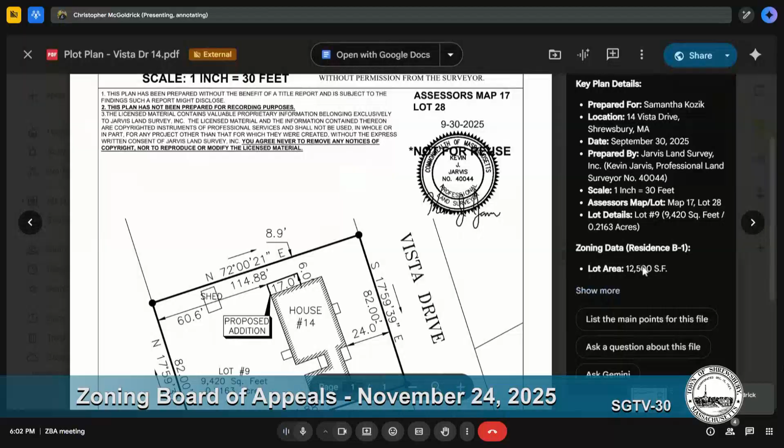If you could walk us through what you're intending on doing. So we live in a 3-bed, 1-bath ranch. We have 2 kids, third on the way due March, and we're looking to add a master bathroom off of the north side of our house, which is where the property is a little bit tight. We chose to go off the north side of the house instead of the west side to preserve the size of our yard that we have remaining. I think it'd be 17 by 6 feet, but currently the 1 bathroom is a little tight.

Imagine. All right, we're going to open it up for the board's questions. Dave, would you like to start us out? Nothing yet at this time. Ann? I didn't have any questions about this. It seems pretty straightforward. Thank you. Megan? I don't have any questions. I'm good.

Okay, I'm just trying to understand, that's all. Take your time, Fran. Yeah, I don't have anything right at this moment, but let me try and understand. Okay. Maybe we hear some public comments and get back to comments? I agree with that. Okay, all right.

This is a public hearing. Is there anyone that wishes to be heard on this matter? Okay. Can I get a motion to adjourn the public hearing, please? I move to adjourn the public hearing. Second. All in favor? Aye. Any further discussion on this?

Fran? Yeah, so we have a shed existing there, according to plot plan? Correct. There is an existing shed there? Yes. Did any of the abutters get notice? Nobody here? No one's here. So we did receive some correspondence, I believe that was included in the materials, more just questioning about specifics of the application. That information was provided to the abutters, so they were notified and we got some questions. I'm good, I don't have any more.

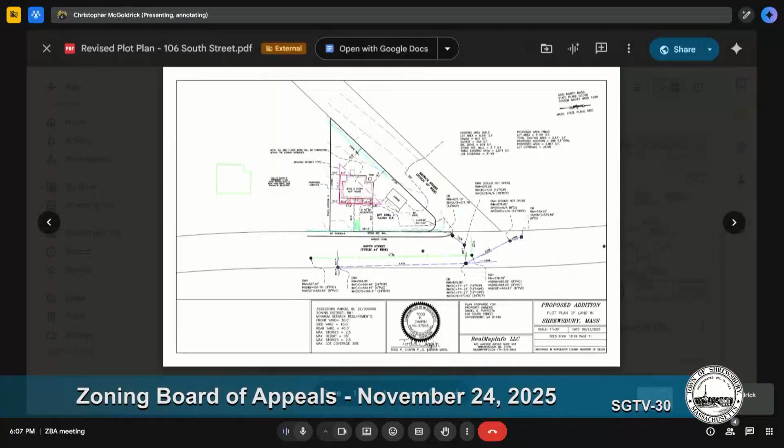Did you say you're going to demolish and rebuild the garage in the same location where it is? Actually, yes, both the house and the garage. The garage has the same condition as the house, which is not possible to recover; it's very unsafe and so deteriorated that it's not possible to fix. So the garage is exactly the same footprint as it is, and the house is the one being expanded, correct? Absolutely, sir, yes.

I got nothing else right now. Ann? So I do have a couple of questions. If I understand correctly, both the house and the garage will be demolished, is that right? Yes.

Can you explain a little bit about why it's not possible to build the new construction in conformity with the setbacks? Yes, we have a building permit right now, and when we started working with the engineer and the contractors on the walls, they reported the walls were in bad condition and not safe to work on first. The house had been built in such a way that it doesn't conform to any construction codes up to date. It has no seal plates, no foundations, the walls are like 2x3s, they have no insulation, and there is no attachment between the foundation and the walls.

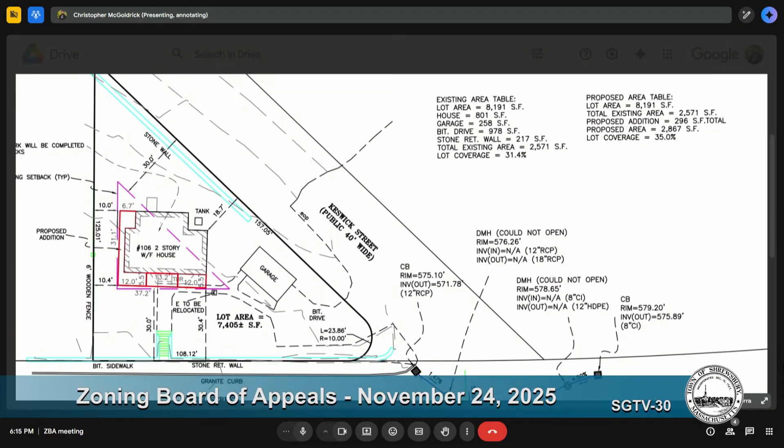There's currently a lot of trees and whatnot on the South Street side and the Keswick Street side, correct? Yes, yes.

That's all I have. Mr. Garcia, you have a fairly steep retaining wall on the South Street side, I believe. Yes. What's the integrity of that wall? It's very solid. I already brought some contractors in there, and everybody's amazed how steady that wall is. It's been that way for so many years, and nothing has happened to the wall. It was made in a good way, and it's very solid, solid as a rock.

Could I just ask again, with the garage, is your intention to do nothing to the garage? You're going to rebuild it in the same footprint? And it is a two-car detached garage? No, it's only a one-car garage. One-car detached garage that you intend to rebuild? Yes, one car garage, yes.

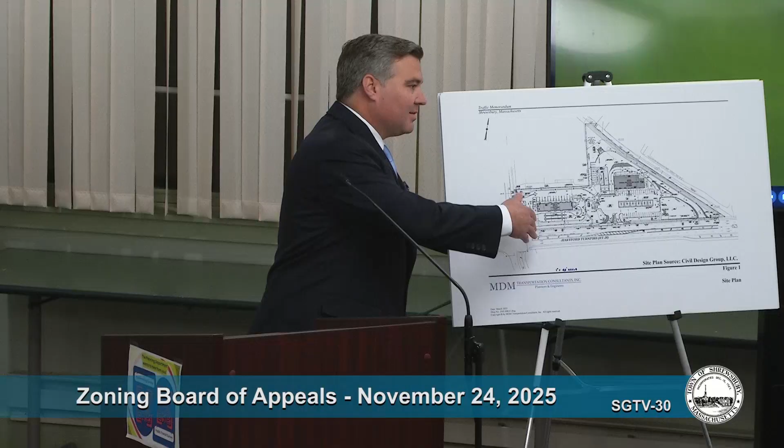My client, Demoulas Supermarkets, Inc., owns the shopping center at Edgemere Crossing, shown across the street from Route 20 here at 200 Hartford Turnpike. Can you see this okay on this side? I wish we had it on the screen. Can I turn this way a little bit?

The original site plan that the applicant proposed had driveways located here, up at the eastern end on Route 20, right in the middle on Route 20 here, and then on Lake Street over here.

Now, through the planning board process, the applicant had received some negative feedback from Mass DOT about this middle driveway on Route 20 here. It originally had a left-out option and a right-out option. So the left-out option would go east on Route 20, the right-out option would go west on Route 20. We raised this as one of the issues in the planning board process, but Mass DOT also provided some negative feedback about it.

Eventually the applicant eliminated the left-out option onto Route 20. Reason being, you'd have to cross the westbound traffic through multiple lanes, and it's a very high-speed area there because of it. So that was eliminated. That was a necessary item for this to proceed forward. We think it was the right choice, but as the traffic engineer for the applicant identified, this in and of itself created additional problems with the site plan as it existed. It contributed to problems that already existed with the site plan.

The applicant was here before this board approximately a year ago, September of 2024, seeking special permits and variances. When it was here, it presented the original site plan to the former board that existed at the time, and that had that left-out option. Obviously, it was a proponent of that at that time. In being a proponent of it, the traffic engineer of the applicant demonstrated and advocated for that left-out option, claiming that it was basically a necessity of the site plan for it to function.

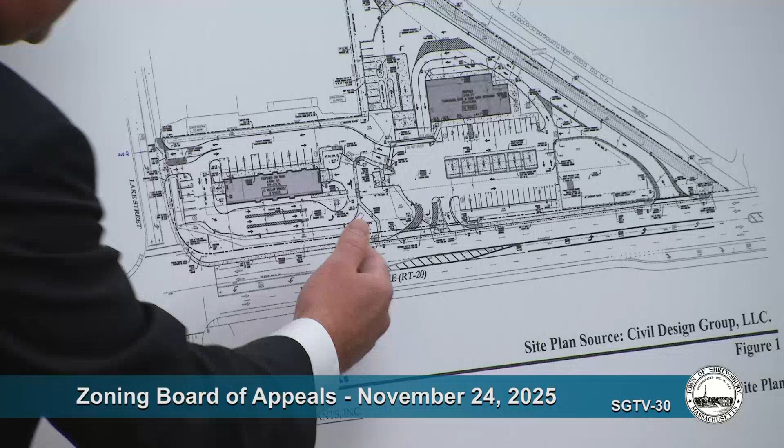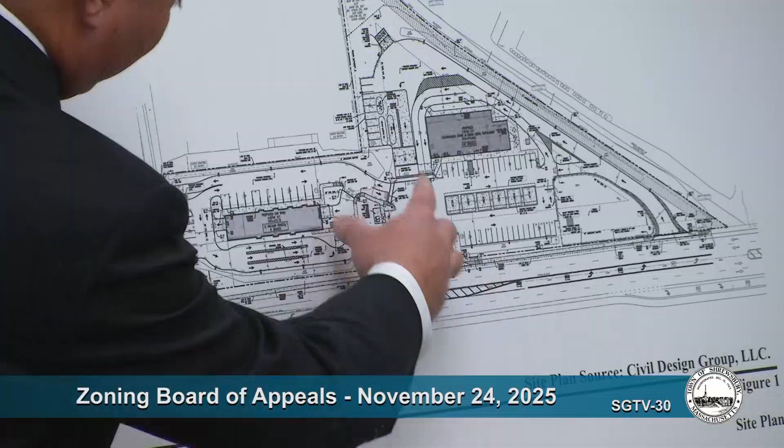So what he was describing is someone would come out of this middle driveway on Route 20 and get in the left turn lane to then make a U-turn, but through Edgemere Crossings Plaza, through where the Market Basket is located today. Not stopping to shop there, but bypassing the people that are coming and going from their cars to go to those shops, to the bank that's there, and using that to go to an easterly driveway up here at Edgemere Crossing to then get going easterly on Route 20 again. Or the other alternative he identified was that it would force more traffic to go over here to this Lake Street driveway.

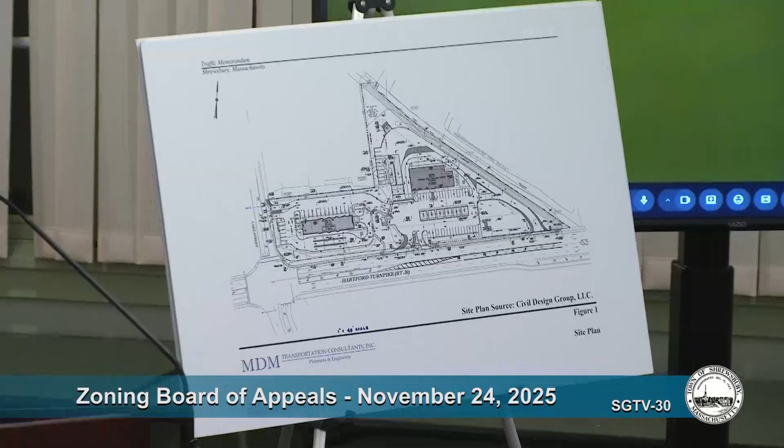He stated at another point in that hearing before this board, at the 30-minute mark, quote, I mentioned unintended consequences of anything that's developed here. To the extent a left turn is not allowed, folks will have to rely on Lake Street more regularly, or would most likely use the Edgemere Crossing Plaza as a staging point to be able to continue their trip eastbound. I don't think those conditions are ideal, end quote. That sentence was his words. I don't think those conditions are ideal. They're not ideal. Forcing traffic in this congested area, or more likely, as he said, through my client's property, to use it as a thoroughfare.

So as to that Route 20 driveway, what did the applicant do before the planning board within the last year while there were a number of hearings? The applicant did not offer any solutions to prevent what the traffic engineer identified was the likely scenario of people going through Edgemere Crossing, through that plaza to reverse direction. It's a significant safety issue for Demoulas. At the very least, obviously, a nuisance issue.

As to the proposed driveway on Lake Street, it's located only 120 feet from the intersection where the light is here, Lake Street and Route 20. There's natural queuing that occurs along Lake Street because of the signal, as you have with any signal throughout the town. A signal is designed intentionally to stop traffic for a period of time, so you can have an orderly flow of traffic going in each direction. There's obviously natural queuing that occurs there. The problem lies with where the applicant wants to put this driveway because of that queuing. It wants to put the driveway within 120 feet, which is very close to that signal. And that comes within the queuing area. Rather than put it up here, where there'd be no queuing, put it within the natural occurring queuing area.

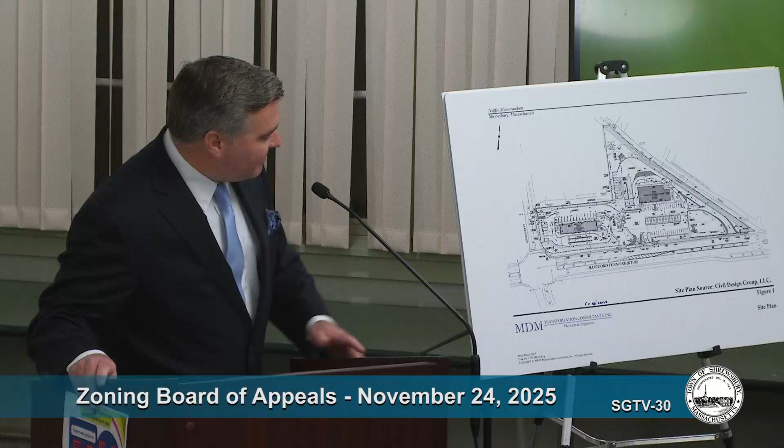Demoulas also hired a traffic engineer, Mr. Nagy, who's here tonight. He has a lot of experience with this intersection, having worked for Demoulas, the design and the mitigation that goes on here and the monitoring. Demoulas hired him to come before the planning board to identify and share his expertise and his analysis with the planning board. And he said similar things to what the town peer reviewer traffic engineer had said. He identified that this could increase congestion in this area because of how close the driveway was to the signal, how the natural queuing had occurred here, and this would cause issues. Identified that there could be gridlock here because of traffic coming down Route 20, taking a right onto Lake Street, but being blocked by people trying to take a left out and getting stuck in the queuing and then blocking up that roadway. Lake Street's obviously an important street to the town for access in and out of this area.

So what did the applicant do in response to that? Well, before the planning board, the applicant didn't do anything to address that issue.

The only thing it did was, finally at the July 10th, 2025 hearing, bring before the planning board two concept plans for widening the approach on Lake Street right here to make it additional lanes. It would be two lanes.

This was the first of the two concept plans. You can see how they've added an additional lane for the approach. Let's come down here. Okay. And a second one, I'll show you in a minute, is very similar. The applicant specifically identified that this would be the solution to the problem.

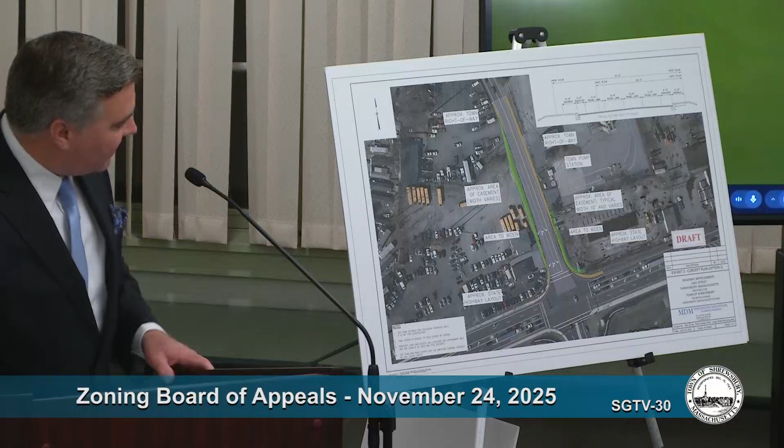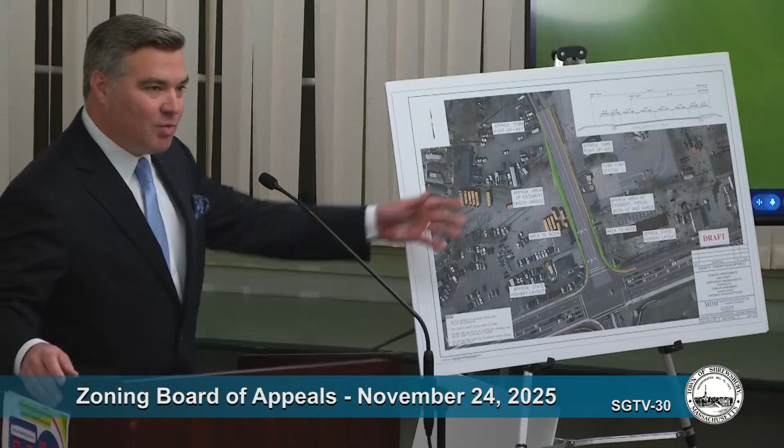They identified that it would require land takings and acquisitions or easement rights from abutters, and potentially the removal of a town pump station that's up here. It's shown in color here, the areas that the applicant identified would have to be taken from other landowners. They came before the board with this idea, but no actual concrete deal in place where landowners would provide this land or these easement rights. So as it stands today, legally, it cannot be done.

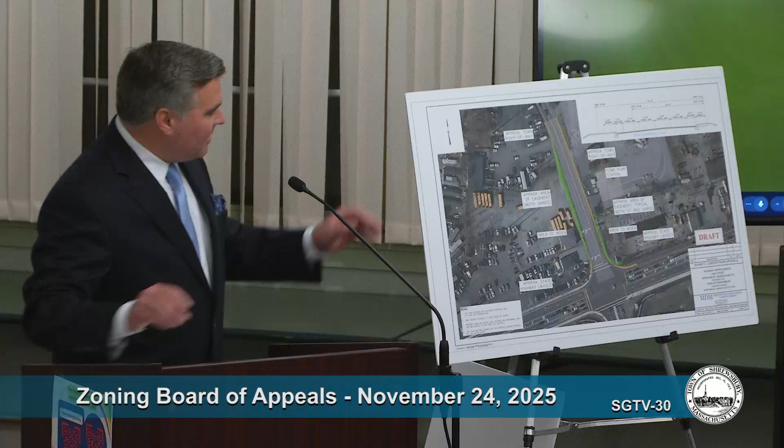Okay, I'll show you the second one, which is very similar. Another version of the widening. Again, the color shows easements or property rights that would have to be taken from other landowners, and the town pump station that might have to be moved up in this area.

There was no evidence before the planning board that this actually was set in place and could be done. There was also no technical information provided by the applicant as to what would be necessary if this could go in place. If they had the property rights in hand and could do this tomorrow, what else would have to be changed about this intersection?

They didn't provide any technical information about whether Edgemere Crossing's driveway here would have to be realigned. They didn't provide any technical information about whether the signals in this area would have to be physically moved somewhere else. They didn't provide any technical information about the two lanes coming down Lake Street that would now turn left and merge over here onto Route 20, if that shoulder needed to be widened in that area. Could a tractor trailer and a vehicle make that transition? None of that information was provided.

Was this the optimal layout? Was this an optimal layout? There was no review of it. And that was presented in July of 2025.

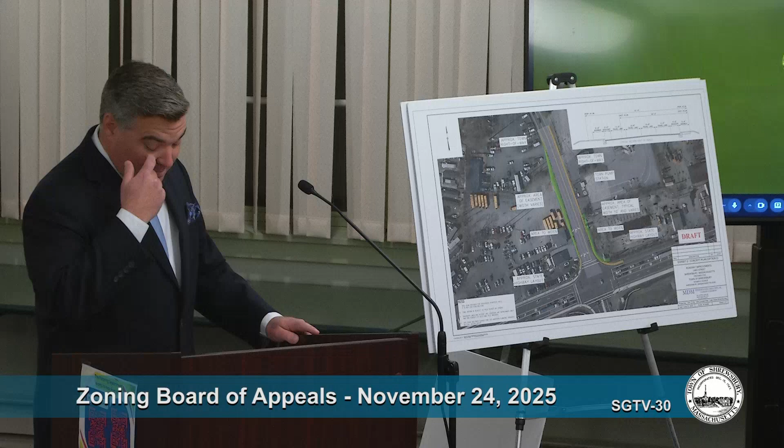These issues, which its own traffic engineer identified as problems, issues that the town peer reviewer identified as problems, issues that Demoulas's traffic engineer identified for the planning board. The planning board was apparently swayed by this concept idea, these concept plans. But as it stood, the planning board did not have any evidence before it upon which it could make the findings required under the bylaws about these certain factors. Therefore, the decision needs to be reversed and site plan approval denied. Thank you for your time.

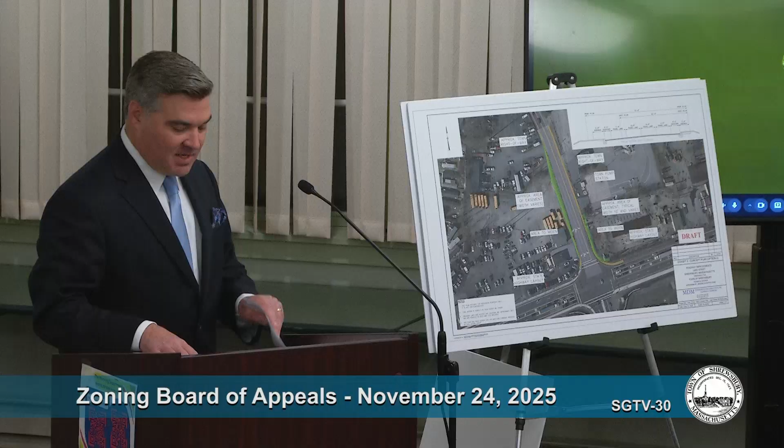Thank you. Would you like to go first? Sure. Thank you. I have some questions of Attorney Madaus.

Thank you for coming, Attorney Madaus. If I'm understanding this correctly, this is a somewhat unusual appeal of a planning board decision coming before the ZBA because of a quirk of the law. Are you able to tell us what our standard of review is here today?

Sure. Thank you. Good evening, members of the board. Stephen Madaus, Town Counsel. In response to that question, our bylaw provides that any person aggrieved by a site plan decision may appeal under Section 8 of Chapter 40A to the Board of Appeals. So it's not necessarily a quirk. Not all municipalities provide an appeal mechanism for site plan review, because as you know, site plan review is a review of an allowed use. It's not a determination as to whether the use would be allowed, like a special permit.

It's a review with limited reasonable conditions to regulate the use. But our bylaw provides an appeal process, not just for the applicant, but for any person aggrieved by a decision of the planning board. It invokes Section 8 of Chapter 40A, which you're familiar with as an administrative appeal. So this board has all the authority of the board below, which is the planning board, to modify or overturn the site plan decision subject to appeal. Of course, the burden is on the appellant, as presented by Attorney Fiore, to make their case as to why the decision should be overturned. It would require 4 votes of this board to overturn or modify the decision of the planning board, pursuant to your rules.

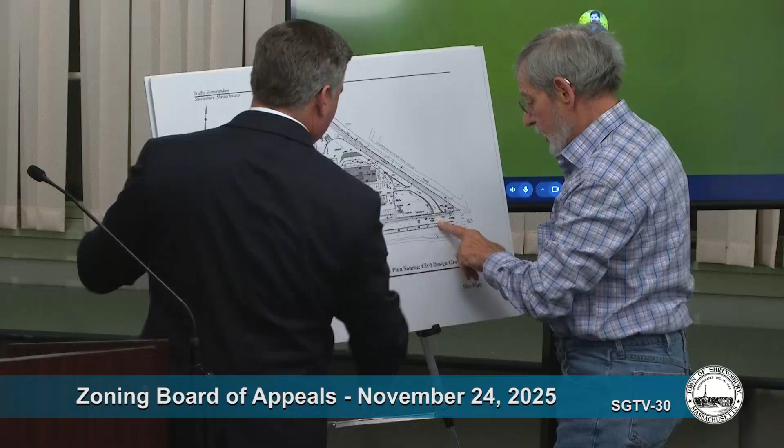So a traffic signal? You're pointing to this easterly driveway, which is a one-way. Well, it can be made two-way. Make it a light, is that possible? In relation to putting a traffic signal there, that would require MassDOT approval to consider. They would determine if it meets the warrant for a traffic signal at that location. That's not under the purview of the planning board to compel.

My opinion, this is never going to work. It's just never going to work. Someone's going to block this, it's going to jam up worse than it is. This exit, you can't go out here to try and make a left-hand turn, or it's going to be mayhem.

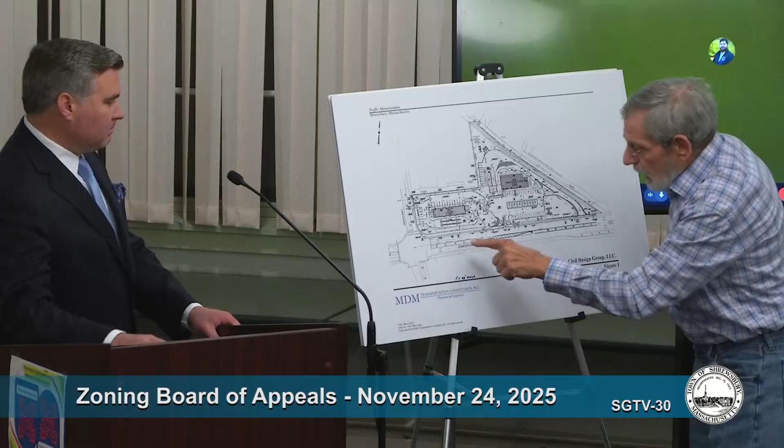Can you make a U-turn out of here? How many left-hand turn lanes are there? One? I'm asking you, sir, how many left-hand turn lanes? I'd ask Mr. Nagy to confirm. Say your name for the record, please. Rob Nagy with VHB. So there's only one left turn lane at that location, heading in the westbound direction.

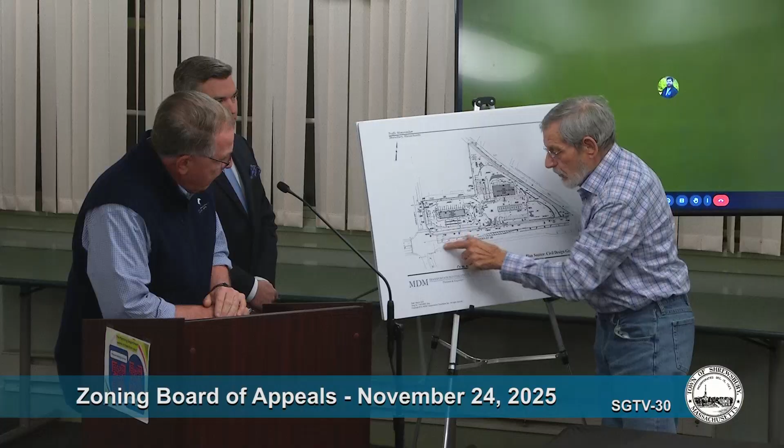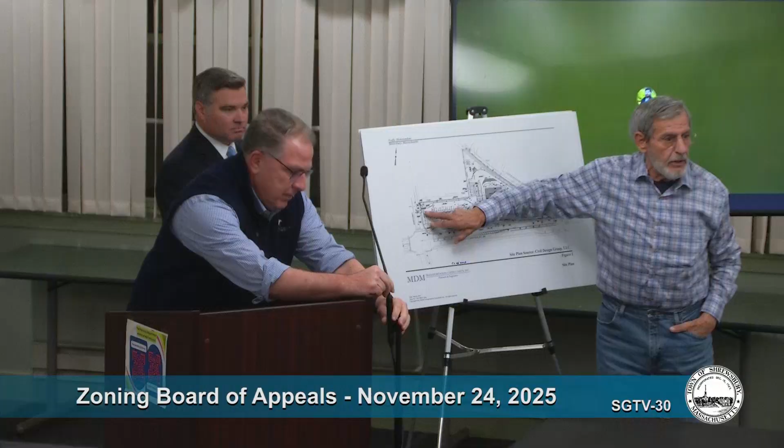So someone coming out of here making a right could reasonably make a U-turn right in the middle of the road. He doesn't have to go through here. Can you speak through the chair, please? What I'm saying, madam, is that this will not work, in my opinion, in any shape other than making right-hand turns that go north. In my opinion, people could make this left-hand U-turn, which is a mitigating thing.

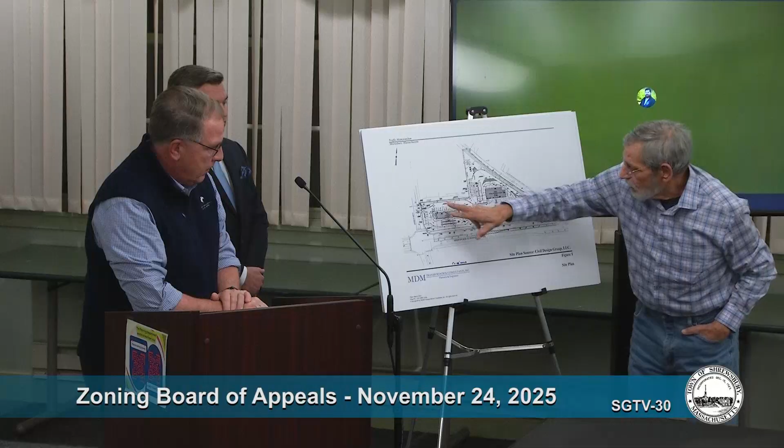Another mitigation to me is to traffic light this thing. But this, making a left, coming out here, I won't support it.

So I just wanted to state, in terms of this plan and the review that was done, we've uploaded the planning board's record. The board has 100 days to consider this application, which puts us beyond the December 22nd meeting. What I'd encourage is the board members to look at the record that the planning board considered. There's a wealth of information there that goes into significant detail of the turning movements, of different design elements, and the planning board, in rendering their decision, considered all of that information.

In addition to that, I would point the board to the conditions of approval of that decision, which includes extensive post-occupancy monitoring of traffic. It includes additional improvements and potential for improvements both to Lake Street, as well as encouraging coordination with MassDOT on the Route 20 sections that connect to the driveway.

A major part of the discussion certainly was traffic. The board and any members of the public are well aware of the existing conditions at this location that are challenging, to put it lightly, in its existing state. The board is, I'm sure, aware that Demoulas and their project was recently put in. The status of that, they also have traffic monitoring obligations that essentially mirror what was placed on the 193 Hartford Turnpike applicant to a large extent.

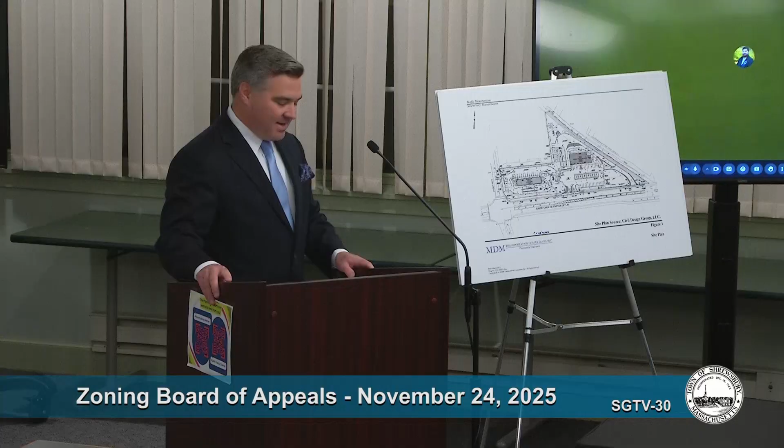If that's the case, how come he said something different a year ago to this board—that they needed that left turn, because otherwise people are going to go through Market Basket's parking lot or clog up Lake Street? So it's not personal at all. I ask you to look at the record entirely and appreciate your attention to it and your decision. Thank you.

So if it is in agreement with the board, I would like to ask for a motion to continue the hearing to a date certain, which would be December 22nd. I will move to continue the matter concerning 193 Hartford Turnpike to December 22nd at 6 PM. Second? Second. All in favor? Aye. So moved, thank you.

Got my seconds and my ayes mixed up. It's all good, right?

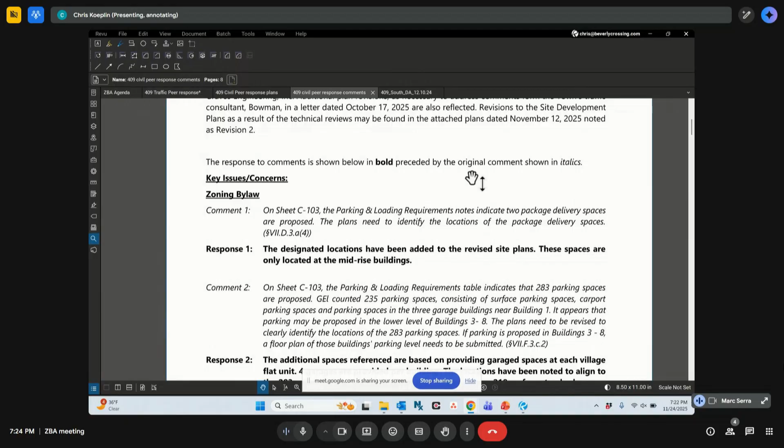I don't know if it's coming up. Is that coming up? I guess, let me see what's up. Let me stop sharing. Share it again. Try it this way. There we go. So I'll go through the comments that we did provide responses to. I'll try to focus on the more consequential ones as opposed to really some of the typographical or administrative notes, and I'll abridge the correspondence between myself and Mr. Walsh.

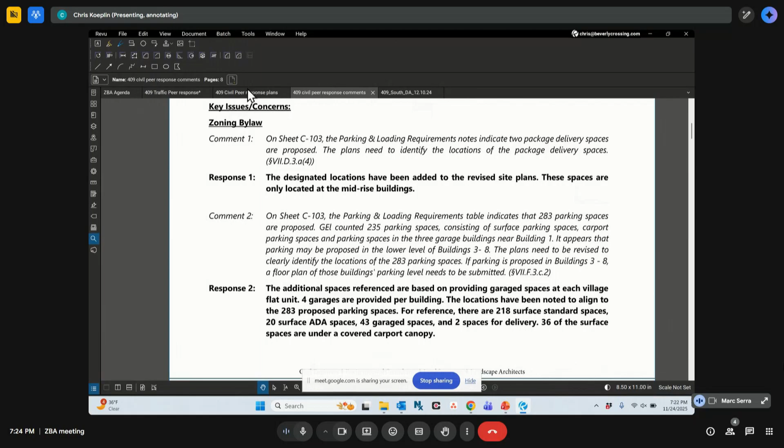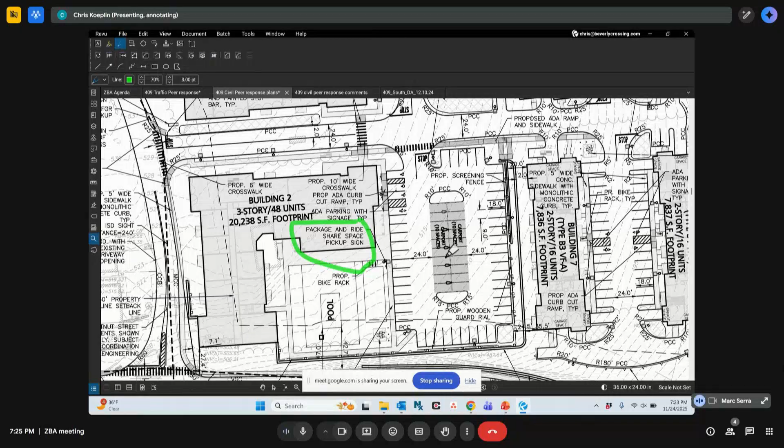On our site planning, he had asked that we provide a designation of where 2 package delivery spaces would be located at the mid-rise buildings. That was simply a labeling note, so we have 1 space at each of the mid-rise buildings. At the Village Flats, those operate more as a small-scale residential, so those spaces are generally open to everybody. And I see Chris has the plan up, and he's going to highlight. Package and rideshare space right at the amenity entrance, and a similar space exists on the opposite building on the other side.

Mr. Walsh noted about parking spaces -- the plans need to be revised to clearly identify the locations of the 283 parking spaces, is the general gist of the comment. What we failed to note, or Mr. Walsh failed to pick up on, is the parking spaces associated with the Village Flats. There are garage spaces inside each of those buildings, so those have been clearly labeled and annotated as such on the plans, and we think he'll find that very straightforward.

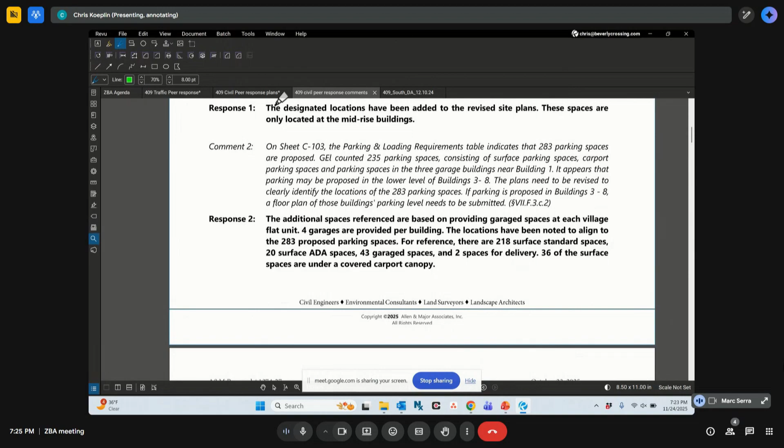On one of our sheets, please note the electrical, telephone, and cable conduit connections for buildings 5 and 6 -- those have very simply been added. Those will be subject to final refinement and detailing as we walk through the process with Selco on the utility conduit layout. Plans need to include names and addresses of abutters located adjacent to the property. This is a requirement of the zoning bylaws, and he cites the section. We've simply added those, all of the names as they exist on the tax assessor rolls.

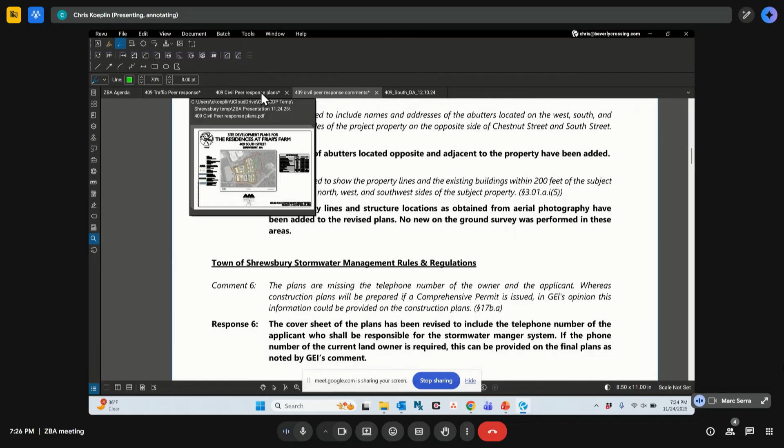Similarly, the plans need to show property lines and existing buildings within 200 feet of the subject property to the north, west, and southwest. We have done that based on digital aerial photographs. We digitized in property lines. No new site survey, but it's hopefully enough for the board to identify where adjacent structures are to the best of our ability.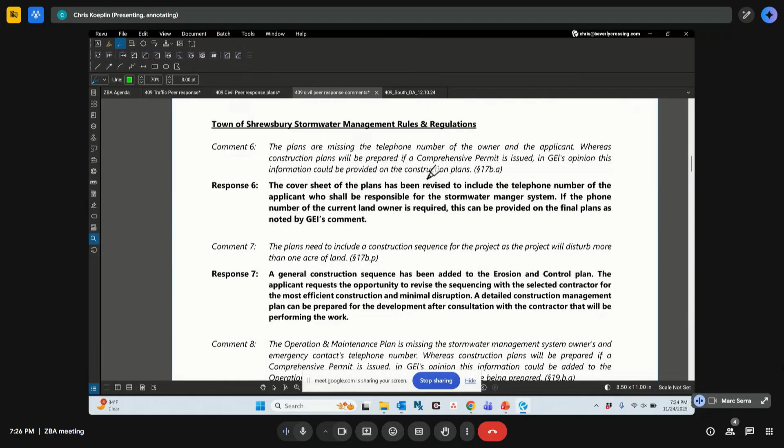Under stormwater management rules and regulation, the plans are missing telephone numbers of the owner and the applicant. We certainly added those to the cover sheet as requested. We also note that Graves Engineering had put in place that this information could be deferred to a condition and provided on the final construction plans. We've included it at this stage, but should the board wish more information, we'll make sure that's in place for the final plans that come in front of the board prior to construction.

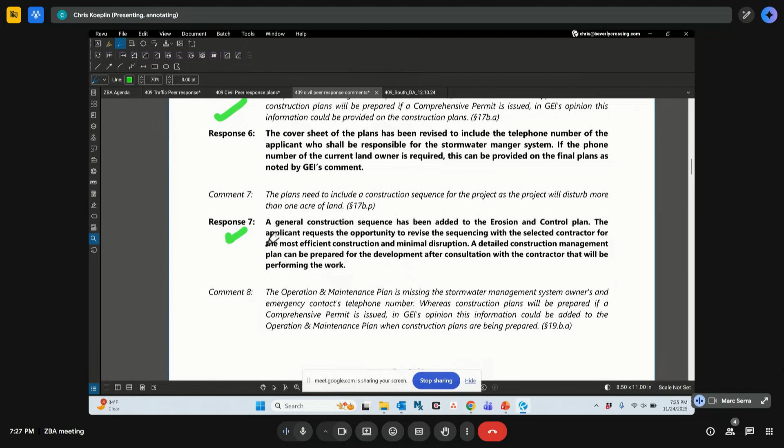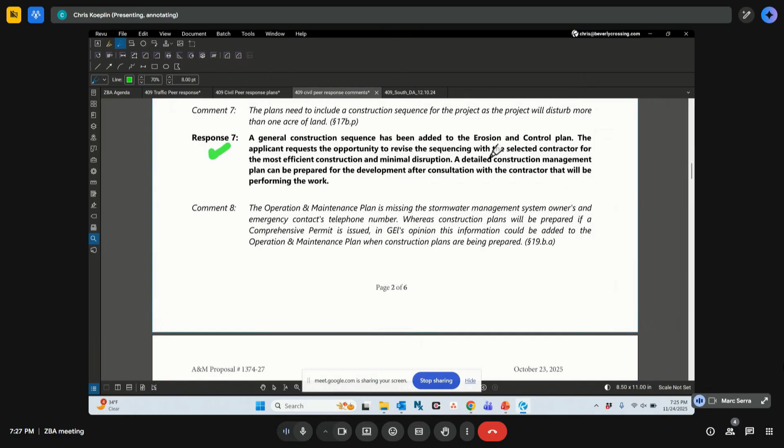Similarly, under comment 7, the zoning bylaw requires that we put a construction sequence on the plans where we will disturb more than 1 acre of land. We have added that on the erosion and control plan to give a general step-by-step itemization as to how this project would be developed in terms of the earthwork, the foundations, general cuts to fills. But what we also asked for in the letter is the opportunity to further detail that construction sequencing as we get closer to construction. We always look to put information on the plans in a schematic fashion at this stage, but as we engage more consultants and know more about the project and how it will ultimately be built, we will further refine that.

Should the board want that additional information, similarly to the comment above, we would provide it as we get closer to construction in a construction management plan, which will be a more wholesale document than the notes on the erosion plan. Comment 8, the operation and maintenance plan is missing stormwater management system owners and emergency contacts, and he goes on to note this could also be a future condition. We have added that information as appropriate, but final management details for the O&M for the stormwater systems can be integrated into those final documents.

Comment 9 is really an administrative note. GEI has no comments relative to the waivers. We provided no responses. That seems appropriate.

GEI under comment 10 did make note about their analysis relative to the number of parking spaces provided on site: 283 spaces, whereas 294 would be required in strict compliance with the zoning bylaw. We spoke about this in great detail during our last meeting with the board, that we are collectively relying upon the information we know about the tenancy, the applicant, our experience with site management for a project of this nature, and MDM Transportation's familiarity with a project of this type. We as design professionals are noting that we believe the adequacy of the parking is sufficient as proposed.

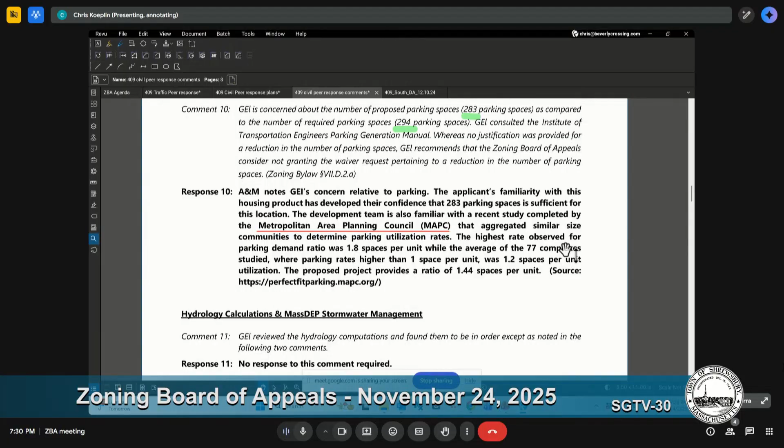1.44, excuse me, 1.44, I apologize. We're providing 1.44. MAPC advises generally 1.2 utilization. Thank you for clarifying.

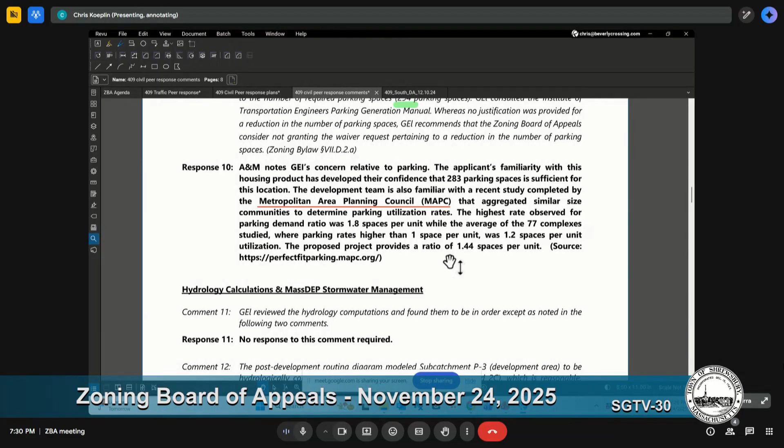Comment 11, GEI made a general note about hydrology computations, found them in order. We agree, thank you. Comment 12, he makes a note about some coordination within our HydroCAD planning model and adding additional schematic information on how the buildings will be drained into the stormwater collection vaults we're proposing. We have modified that information on the site plans to give a general indication as to how the roof drains from each of the buildings, specifically the village flats, will be collected and drained into our subsurface system.

On the rear of the village flats, though, this board may recall we have a walkout on that lower level. So GEI's comment is, how will we drain those if they come out 10 feet lower than the rest of the site? So the design model we put forth is that the lower half of the village flats could drain to the surface, and drain sheet flow down the slope towards the wetland area.

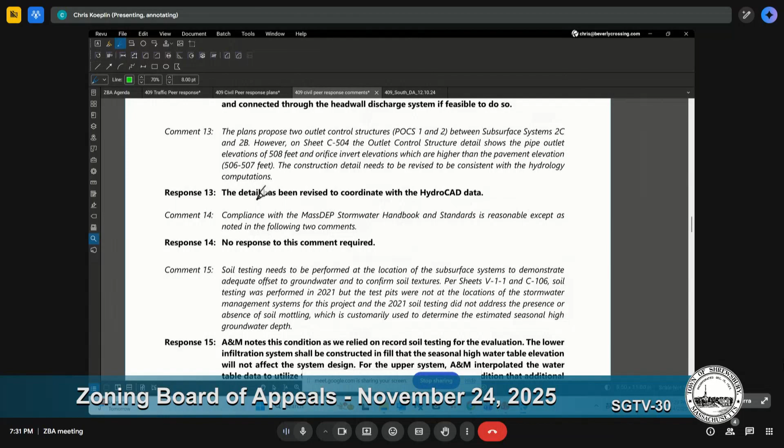Our models take that into account because of the topographic change out here on the site. Comment 13 was clarification and coordination on our outlet control structures for our drainage systems. Our response is we've simply coordinated that with our HydroCAD model.

Comment 14, compliance with the Mass DEP Stormwater Handbook standards is reasonable as noted below. No response needed to 14. However, under number 15, GEI notes we provided some soil testing back in 2021. This board, or the previous version of this board, may remember an application we were involved in that was promoted here on the site.

So we relied on that soil data in putting together our stormwater management systems. The exact location of the test pit is not directly underneath the stormwater field as we're providing on this plan. So what we're requesting through the board is we have reasonable familiarity relative to the drainage and soil condition, but the opportunity to confirm the groundwater location and field position as we near construction, once we have better opportunity to get out and disturb the site. Should we find that anything requires changes, we would have to review them with this board, should there be wholesale changes to the site plans.

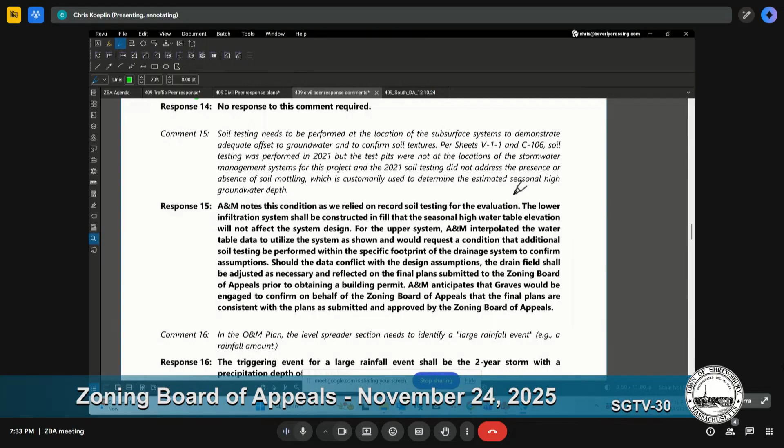Comment 16, in the O&M plan, the level spreader needs to identify a large rainfall event. We've simply done that by saying our large rainfall event is 3.25 inches over a 24-hour period, which is a 2-year stormwater standard. So we've annotated that in the report.

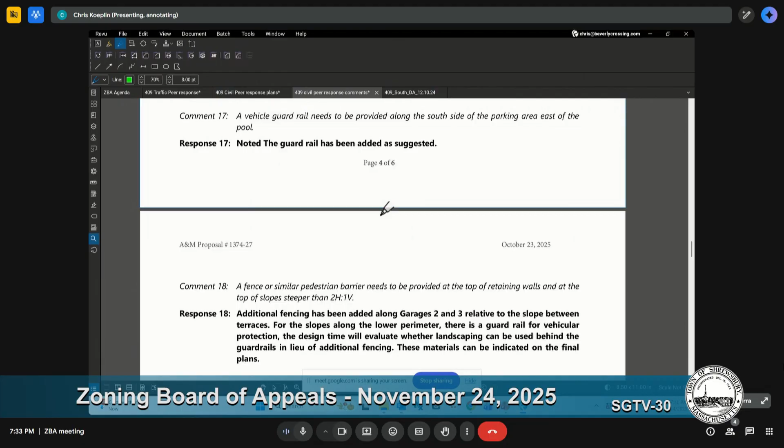Comment 17 is a suggestion to add a guardrail on the south side of the parking area. We have agreed, we have added that guardrail. It is denoted on the plan.

Similarly, comment 18 is about fall protection fencing on retaining walls. We added some additional fencing between garages 2 and 3 adjacent to a slope. For additional fencing, we've asked for the opportunity for the guardrail to be used as that fall barrier—it's a visual barrier to denote that there's a difference and a slope. So we have those measures in place on the final plans.

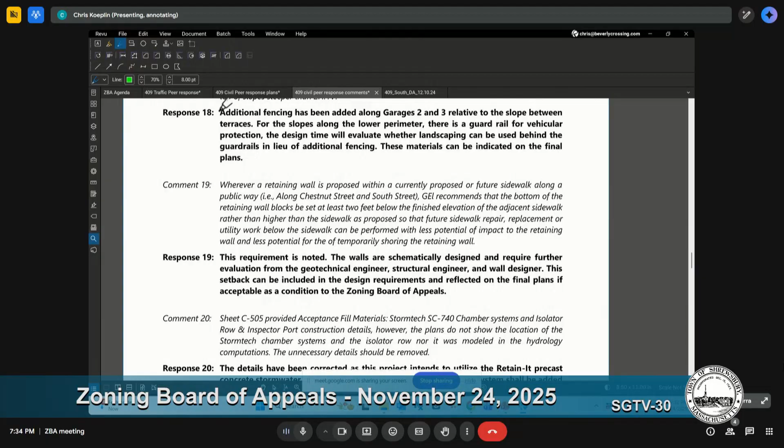Comment 19 is an important one about the retaining walls along Chestnut and South Street. GEI is recommending that these walls be reviewed for stability, not only for erosion protection. We note that and agree with that. These walls will be complex in nature because there's a lot of topographic change here. We will bear the requirement of making sure these walls are fully detailed, designed, and documented, both between ourselves, geotechnical engineers, and structural engineers as part of due course. They would be relegated to a building permit given their height, so we have to go through that level of review and would ask the board to simply note that, and we will put it through its paces and return with that design when appropriate.

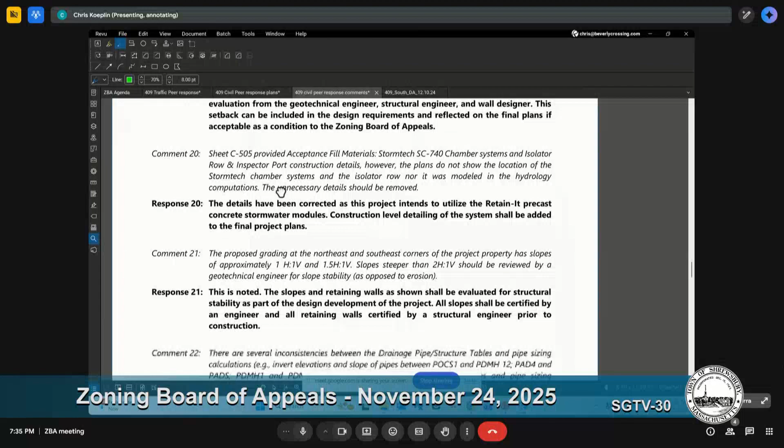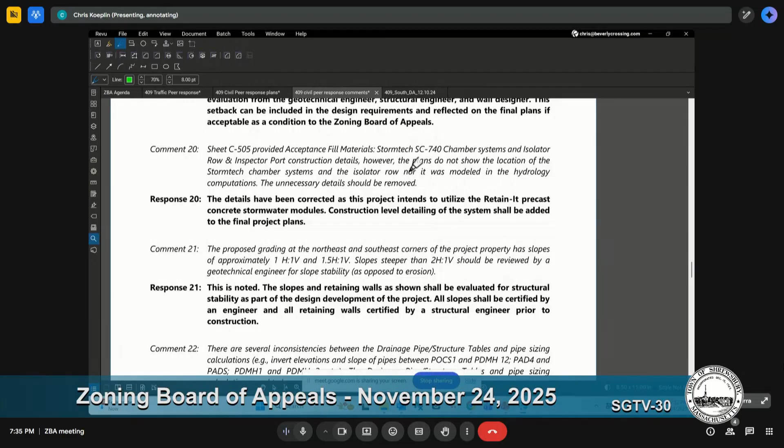Comment 20 is a note regarding acceptable fill materials, and we incorrectly noted a StormTech 740 chamber system. That was an erroneous detail that we've removed from the plans. We've filled that in with Retain-It structures, which are concrete stormwater vaults. That's what we intend to use here.

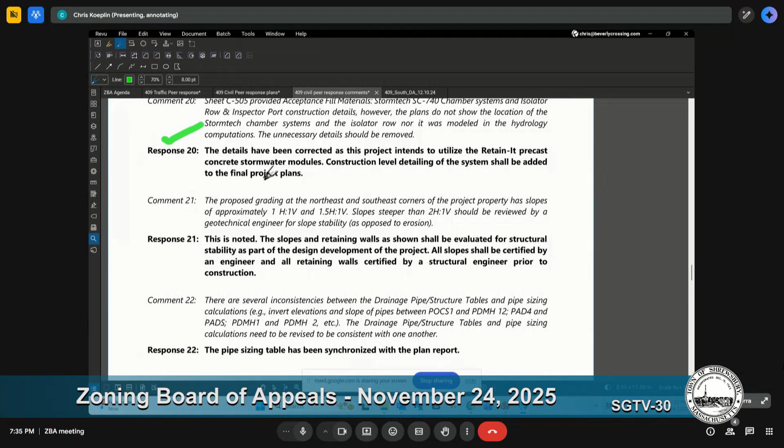Comment 21, GEI makes note about the grading relative to slope stability. Similar to the retaining wall comment above, we bear the responsibility of working with our geotech engineers to ensure the slopes are buildable and stable as shown on the plans. We will continue to do so as we advance these plans from the preliminary comprehensive permit stage up through complete construction documents.

Comment 22 noted several inconsistencies on our drainage pipe structure tables. We have coordinated that information between the plans and the HydroCAD, and we have updated the pipe tables accordingly.

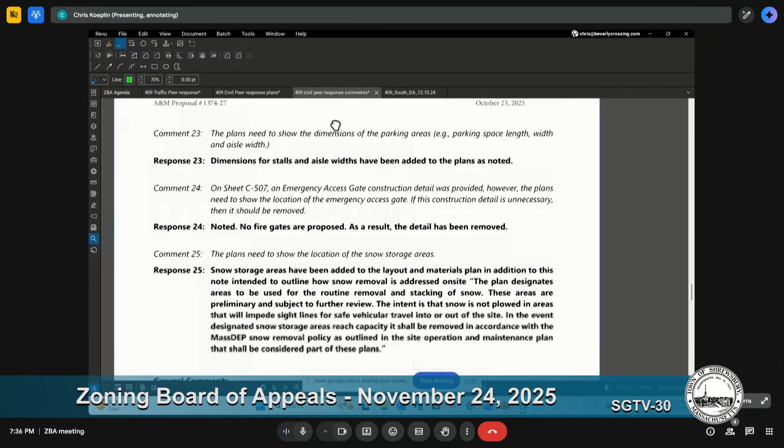Comment 23, the plans need to show dimensions of parking areas, space width, length, and aisles. Those have all been added to our layout and materials plans to confirm the dimensions we've addressed with the board.

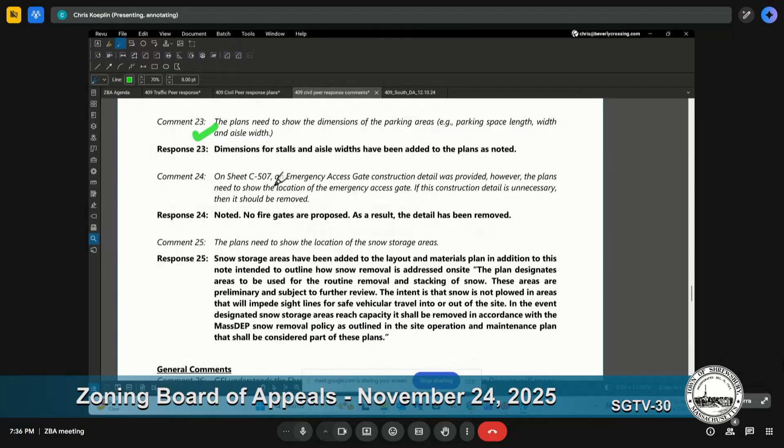Comment 24, we had an emergency access gate detail on our plans. We do not need fire access gates on this site, so that detail has been removed.

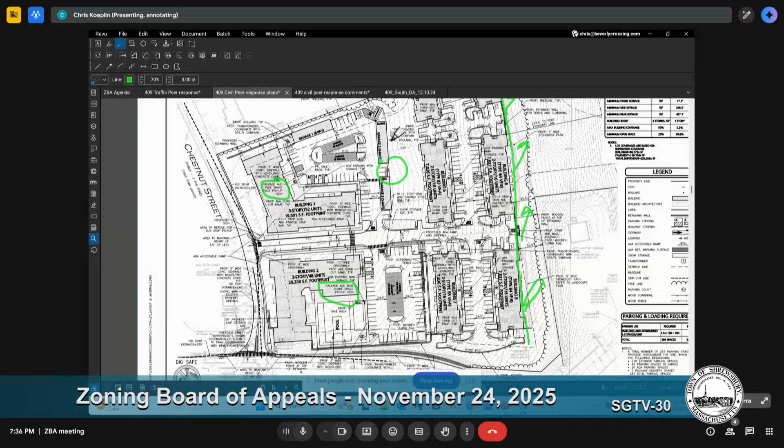Lastly, the plans need to show the location of the snow storage areas, and we have added designations on the plans to be used for routine removal and stacking of snow. These areas are preliminary and subject to further review. The intent is that snow is not plowed in areas that will impede sight lines for safe vehicular travel into or out of the site, and that has been noted on the plan, so snow piling remains low, there's no landscaping conflict, and adequate sight distances are met.

But perhaps more importantly, we identify that in the event designated snow storage areas reach capacity, it shall be removed in accordance with the Mass DEP snow removal policy, which is included in the O&M package that was provided during the permit submission to the board. And then lastly, GEI notes Shrewsbury Department of Public Works Water and Sewer Division will review the proposed water and sewer connections. For that, we have no relative note back to GEI.

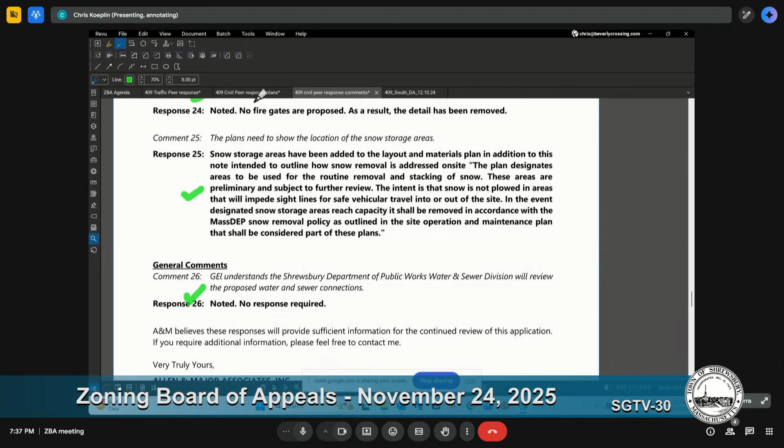We do note that Weston and Sampson had provided some commentary on the site design. The comments, as applicable, have been addressed on the plans, including providing additional details for cleanouts, drop manholes, and sewer profiles - very administrative-based information. It did not change the design intent. Those have been provided on the revised documents and remain in place. As Chris mentioned, we remain committed to working with the town on the sewer pump station improvements that now need to be done, and the timing and coordination relative to this project. So those are in place.

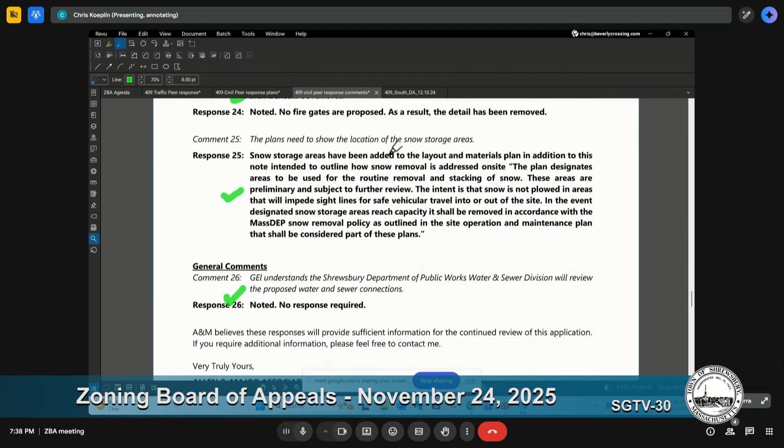And then lastly, not uniquely identified on the particular letter dated by us on November 11, we did, as the site engineers, envelop some comments received by the town's traffic consultant, which were to include a note on the site plans where bike racks are located. So we do have those on the revised site plan. They also made note similarly on the high turnover spaces, the two parking spaces. Those are also noted on the site plan. So we captured the site-related comments relative to the traffic engineering peer review comments in one wholesale swoop.

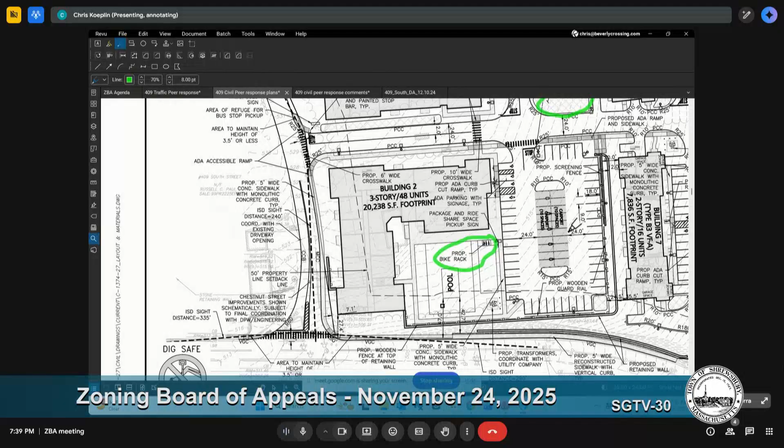And thank you, Chris, for showcasing the changes - the bike racks, as he's highlighting on the plan, are there, and we can, of course, point through and walk through if the board so desired this evening. So that's what's transpired since our last meeting with the board, and I'm happy to walk through any of the technical matters on site engineering if you would like.

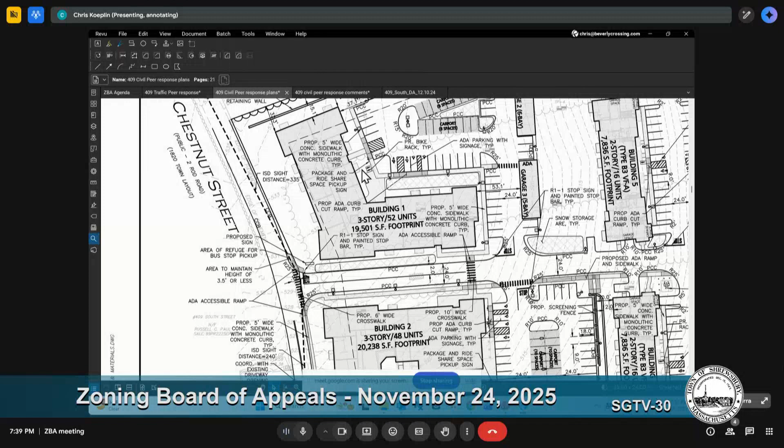All right, I'm all set. I don't have any questions right now. Okay. I think I'm good. I have no comment, madam. Thank you, Chris, the annotation was very helpful. Couldn't have done it without it. Yeah, it was good, true. Oh, very helpful, thank you. Like the color green, too. You can see what we need to see - Christmas green. There we go, see, it's there - Grinch green. Traffic, traffic, thank you. Move on.

You again - I am, I'm here again. Thank you, Chair and board members. Again, Bob Michaud with MDM. I will not readdress some of the issues that Phil just mentioned. I'll focus strictly on traffic-related commentary issued by Bowman. We'll take it point by point.

So parking obviously was a fundamental question in this case, and we've been able to identify not only the industry standard 85th percentile demand characteristics, which are almost identical to what the supply is for the site, but we've also looked at operational sites as examples of what to expect on an average and an 85th percentile basis. So we've got 8 very specific examples of projects and their number of units and parking usage that we've surveyed over time, and what it shows is a high correlation to the industry standard, but slightly lower. Phil had mentioned earlier the MAPC parking studies that corroborate that parking trends are in a downward trend on a per unit basis. It's not unusual for projects like this to have parking supply numbers between 1.25 and 1.4. So we fit very neatly on the higher side of that range. We're comfortable that what's being proposed for parking not only meets the 85th percentile standards that ITE would suggest are needed, but also, more importantly, empirically, are very well correlated to what we see at built projects here locally.

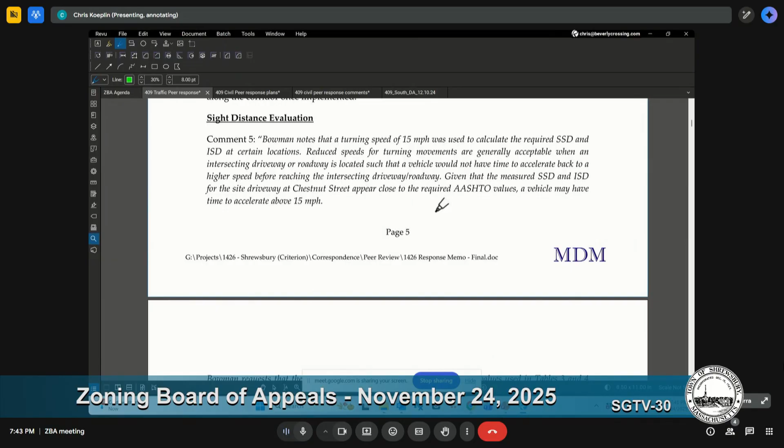Comment 5 related to the sightline issue that I just mentioned, which has been addressed. We'll further point out that on the site plan, those sightline triangles are now identified, and in every case the applicable sightline criteria are met, not only at the South Street intersection and Chestnut Street, but at the driveway itself on Chestnut Street.

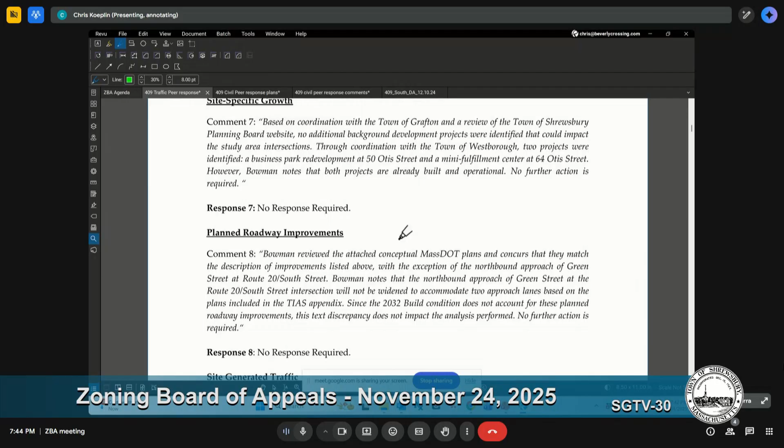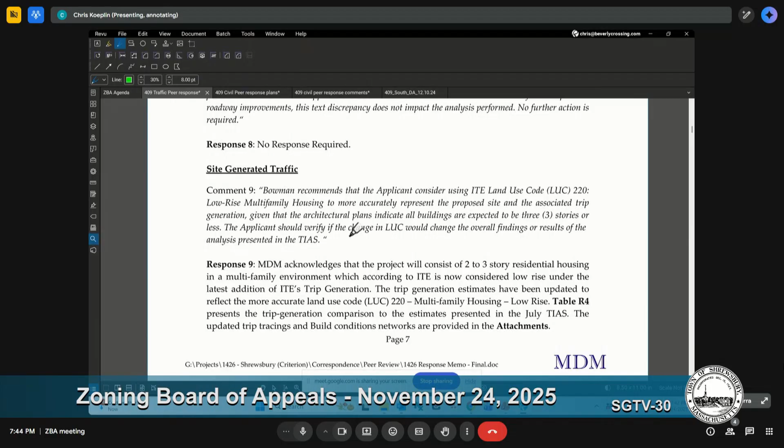Comment 6 is a series of comments that really didn't require a response. So we go on to site-generated traffic, which is comment 9. Bowman correctly points out that the nature of the use is a low-rise development as categorized within Institute of Transportation Engineers criteria. The originally submitted traffic report, prepared in the earlier stages of the project, had estimated a mid-rise product, which is 4 stories and above. In this case, we're talking about essentially 2-story type structures.

As a result, we've rerun the trip generation. It's essentially the same during weekday morning peak hours, very little difference. The evening peak hours does have a slightly higher number of trips associated with it. So we've taken that adjusted trip number and analyzed it again through the modeling, and it shows very little difference, frankly, from what was originally submitted.

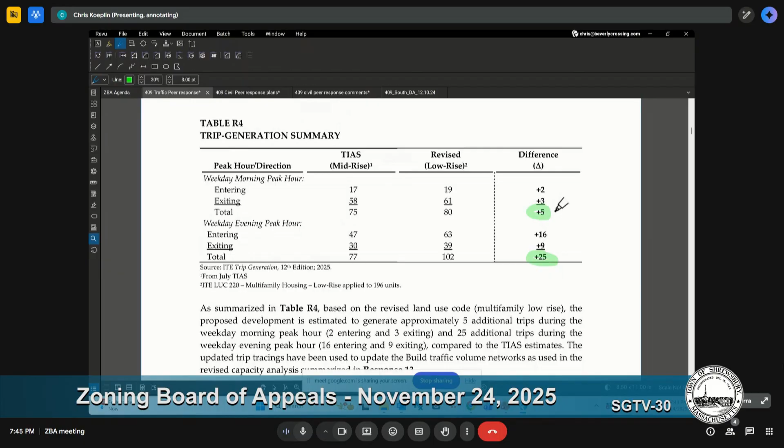The end analysis shows that every one of the locations studied operates at an acceptable operating standard, a level of service D or better. Frankly, at Route 20 and South and Green Streets, that's actually at a level of service B. So there's really no material difference in impact from what was originally studied.

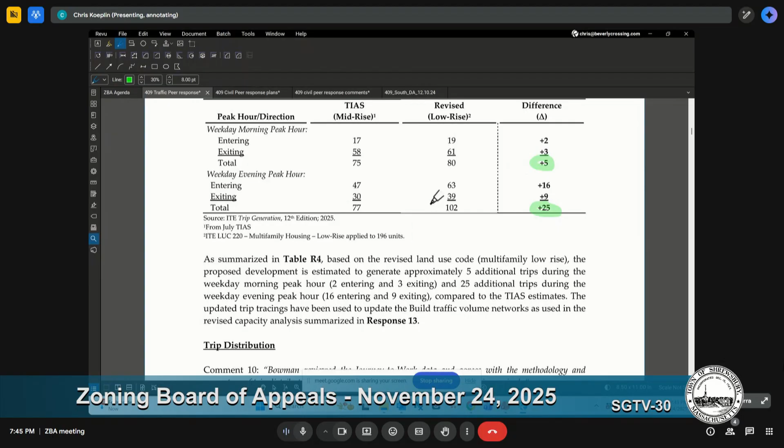They correctly pointed out that the intersection at Route 20 and South Street was recently retimed by Mass DOT, and we now properly reflect that in the analysis. Again, it's really not much different than what was originally published - ample capacity. In fact, there's improved capacity on the South Street approaches relative to where that same signal was a year ago. So it was a positive outcome.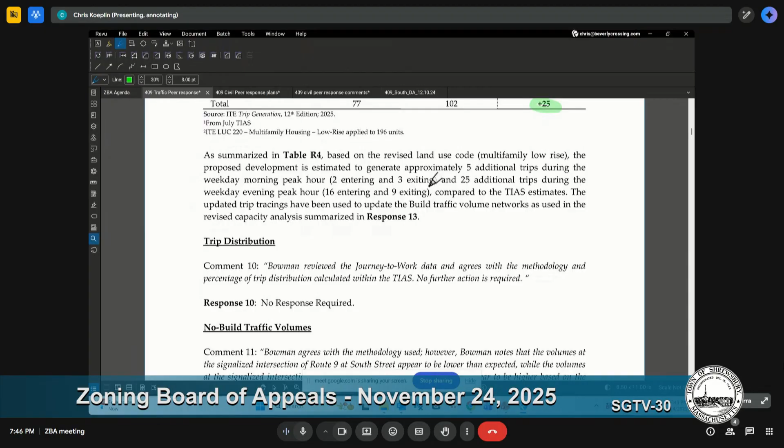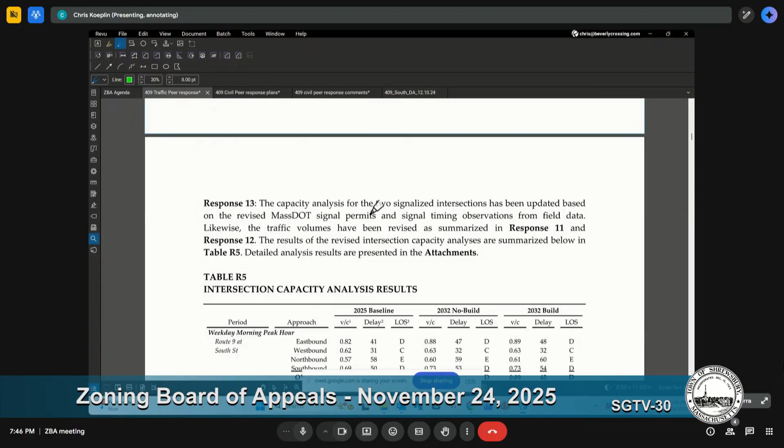As we turn to transportation demand management, the question was whether alternative transportation modes via WRTA exist. WRTA does operate what they call Via WRTA, a dial-up system where if you need a ride to, say, Westboro or Northboro, you can call them and arrange a ride, and this is within the service area for that particular service.

Site access and circulation - I think Phil covered that principally, but there were 2 points related to project-related mitigation. The question was whether an all-way stop would be appropriate at the intersection of South Street and Chestnut Street. We did look at the warrant criteria for that, and the warrant criteria are not met, so it's not a recommended action.

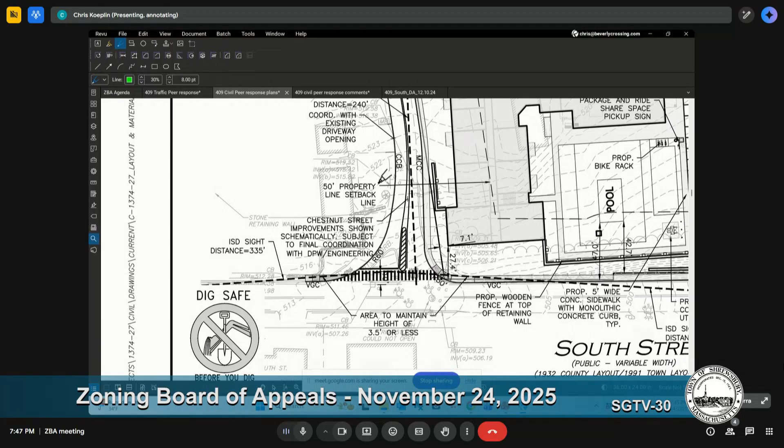As shown in the most current version of the site plan, there will be a significant improvement to the alignment of Chestnut Street and South Street. It will be a much more traditional alignment at 90 degrees, designed specifically to accommodate swept path movements by school buses and fire apparatus that would need to use Chestnut Street, and it's been tested for that type of geometry. It also incorporates a significant pedestrian accommodation across Chestnut Street with ADA-compliant design elements.

The question raised during peer review was whether this is an improvement that would be implemented in whole by the applicant. What are the roles? Who's doing what? Is this a town-related project, or is it an applicant project? This is an applicant-funded, designed, and implemented improvement.

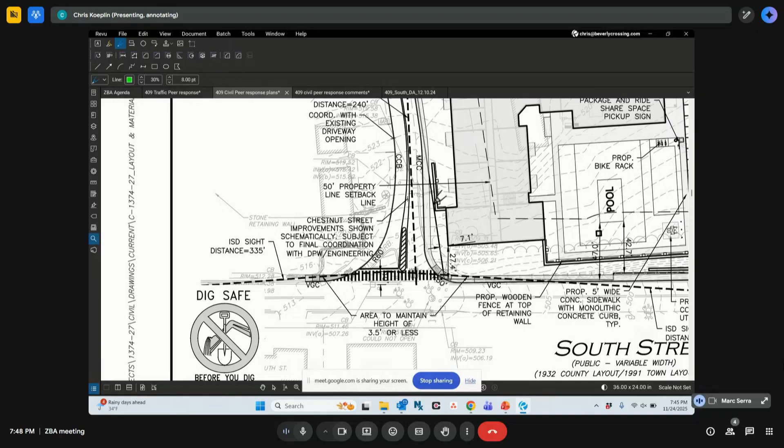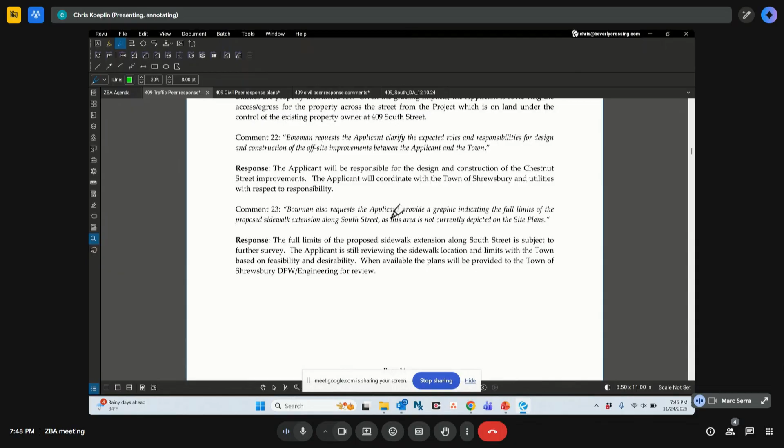Which leaves us to the last point on mitigation, which relates to the sidewalk improvements along South Street. This was discussed preliminarily at the last hearing. We've been looking at design aspects of sidewalks from Chestnut Street to Route 20, and from Chestnut Street to the existing terminus of sidewalks on the west side of South Street. There are design challenges associated with implementing a full sidewalk design to Route 20.

MassDOT is in process of redesigning and expanding the Route 20 corridor. There are utilities being relocated as part of that process that complicate the alignment of any potential sidewalk connection to Route 20. There are grade challenges, retaining wall structures, et cetera, that also make that challenging. To the north of Chestnut Street, a concern raised by at least one abutter was the safety aspects and orientation of any potential sidewalk on that side.

We've looked at options for sidewalk extension on the west and east sides of South Street. We believe there may be a solution on the east side of South Street, still subject to ongoing survey and technical analysis. What we're suggesting to the applicant is that there be a contribution made to affect both the design and implementation of a sidewalk system, whether that includes something only to the north of Chestnut Street or somewhere south toward the Route 20 corridor—something that needs to be hammered out with the town.

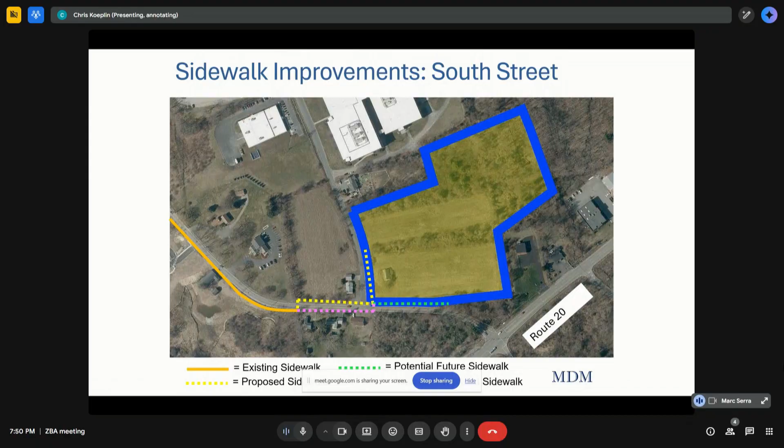The idea is that there would be a contribution, as is the case with other projects in town, toward a transportation improvement fund. That fund would essentially allow for the design and implementation of appropriate sidewalk improvements in and around this area, consistent with what we've outlined conceptually on the aerial diagram on the board. That concludes our response to peer review. I believe we've comprehensively addressed each and every point, but we'll defer to any final commentary your reviewer has.

Thank you. Thank you. Dave?

I think you briefly mentioned that MassDOT is looking at redoing this portion of Route 20. Could you give a little more color on that? I know they have a 10-foot wide multi-use bike walk path—how does that plug into the sidewalk equation?

That's a great question. The Route 20 corridor improvement goes from South Street to Route 9. It's an extensive enhancement, not only from a highway perspective, moving traffic more efficiently, but it also integrates the shared use path component on the north side of Route 20. That shared use path will terminate under that design at South Street, in the northeast corner of the intersection—the site side of the intersection, if you will.

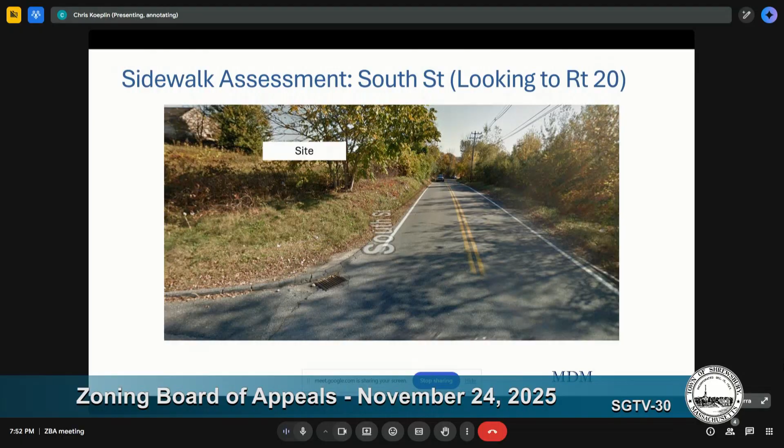What MassDOT currently has designed is a relocation of two utility poles with guy wires on that corner. There will be a widening of that corner radius to facilitate turns onto South Street as you're traveling westbound on Route 20. There are significant grades in and around that area where those utilities are being relocated. There are drainage structures—a lot going on there in that corner that present, in our view, a significant challenge to providing a direct connection to the shared use path along South Street.

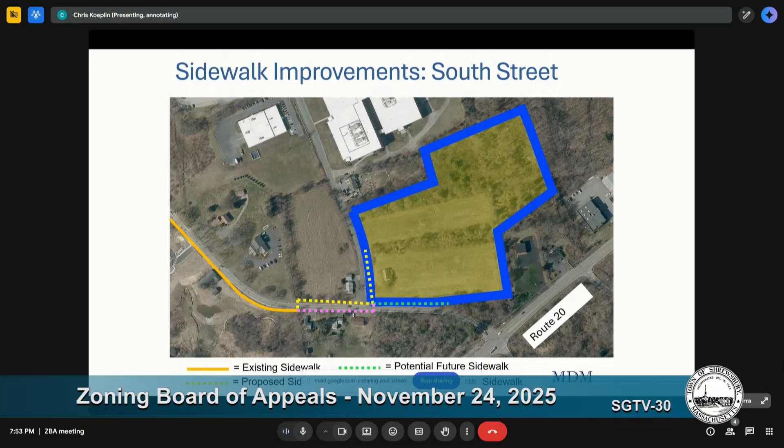On the west side of South Street, the right-of-way literally comes up to the edge of the roadway. There's no available public way to implement a sidewalk on the west side of South Street. So there are challenges to how to connect portions of South Street to that multi-use shared use path. Those technical challenges won't be solved overnight—it's going to require an extensive evaluation, detailed survey, consideration of alternatives, and consideration of those utility impacts. There's no easy answer.

Did that answer your question? Yeah, I was really just looking for color on the whole thing.

Correct me if I'm wrong, but MassDOT is looking at increasing the number of lanes as you're traveling south on South Street towards Route 20 for that light? Yes, there'll be an additional lane on the approach right at the signal. That was actually identified during the evaluation of the CenTech North property, and it's since been integrated into the MassDOT plan, so there'll be a significant capacity enhancement for that South Street approach.

That'll be an additional lane, but there's never been a plan for sidewalk enhancements along South Street. They haven't contemplated them in the MassDOT design, and there are challenges I just mentioned as it relates to right-of-way, topography, and utilities.

Okay, thank you. Ann? Nothing at this time. Thank you for that presentation.

Nothing at this time. Thank you. Fran? Thank you for the presentation. I don't have any comments right now.

Thank you. Chris? If I can, I just wanted to add some of the discussion that we've had with abutters in relation to the traffic as well here. Just add a little bit more flavor.

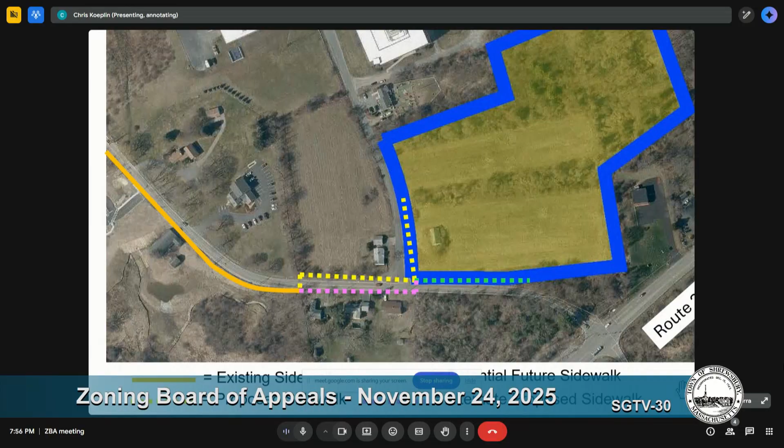But we'll be looking, primarily, as we talk about this potential sidewalk and the location of that crossing, if there's additional contributions to traffic calming that can be done on that side. Again, it needs to be balanced with the project, understanding that that is an existing condition. But in terms of putting in some kind of crosswalk or sidewalk, if that infrastructure has some traffic calming in relation to that, I think that'd be an important piece to look at, whether that's moving the crosswalk up to the start of that curve.

But again, I can suggest things, but I'm not a traffic engineer, so we'll be asking the applicant's traffic engineer to just evaluate if that can be incorporated into the design. And then, certainly the town would take some obligation of implementation of those solutions.

But in addition to that, we're working with the highway department to look at what other things the town can do to mitigate that existing condition. So that's an ongoing issue that we're evaluating. I just wanted to bring that to the board's attention. It was included in the correspondence as well, so. Thank you.

Okay, is there anyone, this is a public hearing, is there anybody that wishes to be heard on this matter? You'd step up, state your name for the record. If you could stick to topics of tonight, that would be appreciated.

Yeah, David Singer, 400 South Street. A couple of different questions and a couple of different things. As far as snow removal, if it's supposed to be trucked out, where is it going to be trucked out to? So we just want to be sure that it's not kind of right off the property and on the surrounding areas there.

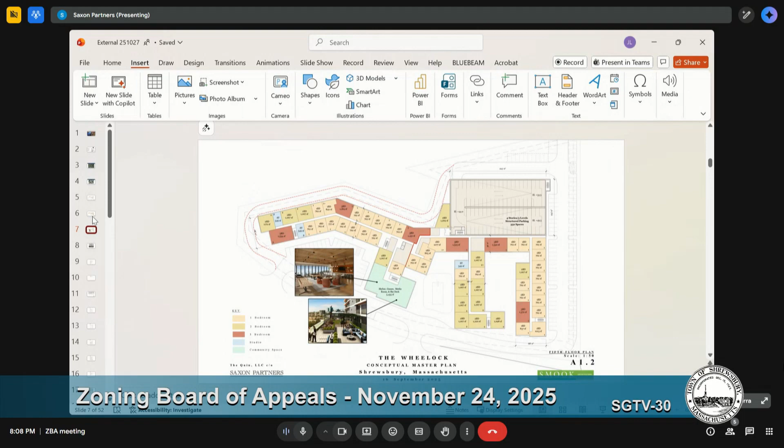From the last meeting on the checklist of things to provide, we were asked to provide a depiction or rendering of what the building would look like and some more color as to the so-called sky view incorporated into the plans. We talked at the last meeting about the change in unit mix as a result of that common area being taken up to the 5th floor. We confirmed those are all uploaded to the portal and consistent with our presentation. With your permission, I'll have Clay Smook, the architect of record, review with you the elevation or rendering of the building so you can have a better depiction of what it looks like from the side.

Sure, Clay Smook, Smook Architecture. So we developed this rendering to take a look at what it would look like, now we're looking up towards the building, sort of at that middle finger piece that we have. What we've done is set back the building on the 5th story to create a fairly robust upper level deck with unobstructed views to Lake Quinsigamond. I know Jack has tried to go out to the site a number of times to do an aerial shot with a drone, which had some challenges, it's a little windy, sort of like early Saturn V rocket launches. So unfortunately we don't have that view, but you'll have to use your imagination - you'll have unobstructed views of the lake. It basically follows the same architectural expression we previously did. We just set back that upper 5th, what we kind of depict as an attic story. Thank you.

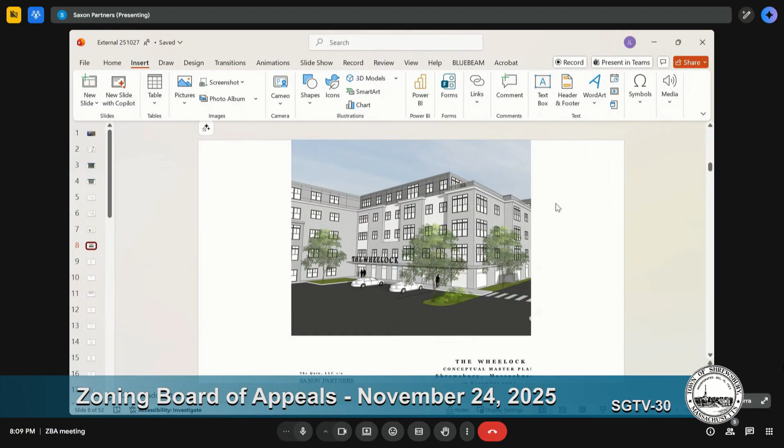Happy to take any questions on that. Any questions from the board? Not on that. Everything? Okay. Moving right along, thank you.

Leading up to the last meeting, there was a flurry of communication with regard to traffic, and we kind of deferred that at the last meeting. I think it might make sense, with your permission, to have Jeff Dirk summarize the information that's been submitted. I know your peer consultant is here also to see what remains as any open issues and discuss those and get direction from the board. So with your permission, Mr. Dirk.

Good evening, Madam Chair, members of the board. For the record, Jeffrey Dirk with Vanasse & Associates, the transportation consultants on the project. As our attorney mentioned, we've had the opportunity to have back and forth with the town's peer review consultant with respect to the transportation analysis for the project. Most of the comments as they relate to our assessment were really dealing with a couple of areas. The first was to make sure that the project, as we've described it, specifically with regard to parking and the layout within the site, was consistent, as we've talked about in the traffic study, with the current site plan.

So we've reconciled the parking numbers for the project so that now they're matching what the site plan was. There wasn't really a comment as to the adequacy of the parking, I think the adequacy of the parking was determined to be adequate. It was more just making sure, as we're speaking of the number of parking spaces, it was consistent with what was shown in the site plan. So we've reconciled that with your consultant.

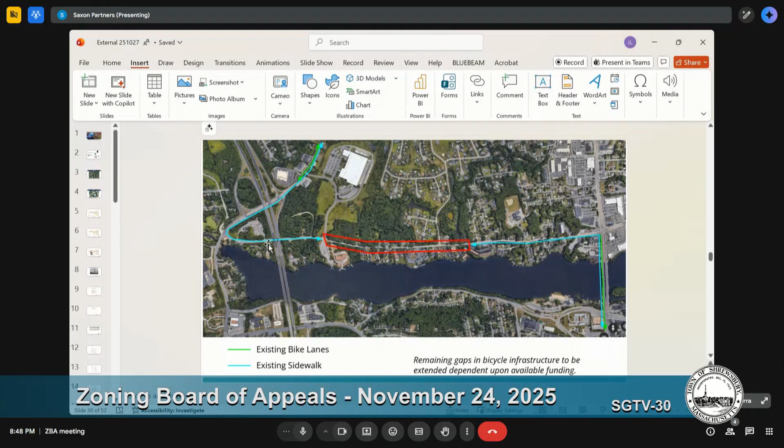So we're a little confused right now because it appears that all the streetscapes, all the sidewalks you're asking about, are presently covered by us in front of our project and are covered by the state. The state paid for all this work in question through a grant. So it's already been paid for. We're kind of scratching our heads saying, okay, you're asking us to do sidewalks and you're questioning our value.

The value we put together includes a contingency of almost 35%. It still only comes up to $42,000. The town came up with a value for the sidewalks, which we don't even know are missing, of roughly $285 per lineal foot. When we look at the Amorello contract and break it down by lineal foot, that's only $107 a lineal foot, which includes storm drains, crosswalks, crosswalk lighting, and 8,000 lineal feet of restriping of road.

So our value is correct at $42,000 for what you were asking us to do, which in the presentation to the Board of Selectmen was 4-foot wide sidewalks. Your plan now, in some places, it's 5 feet. But we stand behind the donation we agreed to do. We agreed to donate $42,000 to complete the streetscape, the sidewalks between the underpass and the red area. Not only are they shown on the town's plan as existing, they actually exist. You can't see some of them because they're covered in grass and haven't been repaired, but they're there.